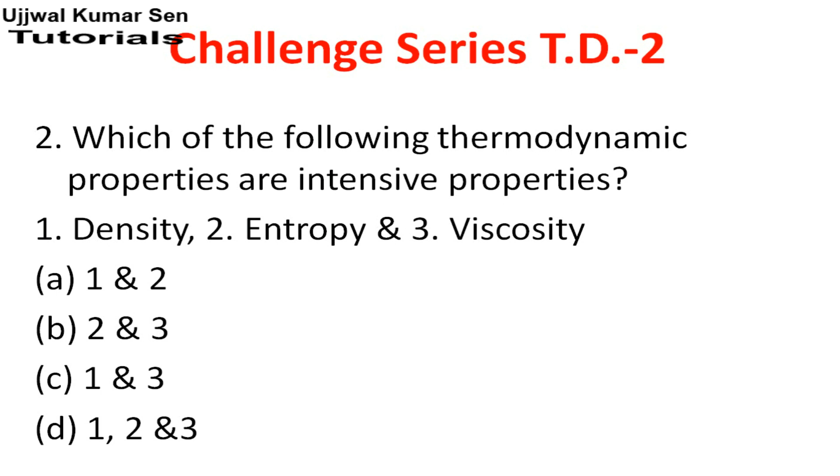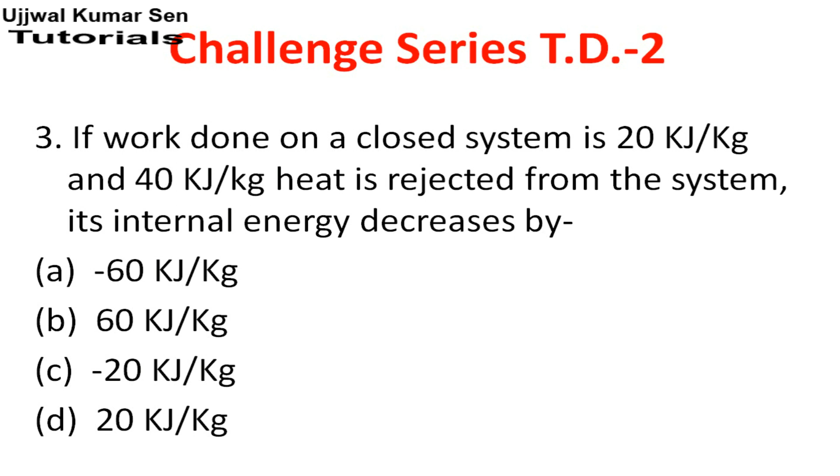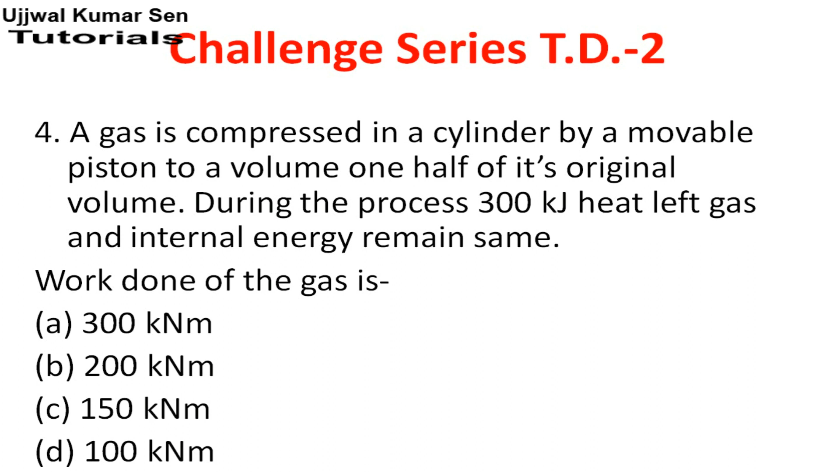Question 4. A gas is compressed in a cylinder by a movable piston to a volume 1/2 of its original volume. During the process, 300 kilojoule heat left the gas and internal energy remains the same. Work done on the gas is: 300 kilo Newton meter, 200 kilo Newton meter, 150 kilo Newton meter, or 100 kilo Newton meter.

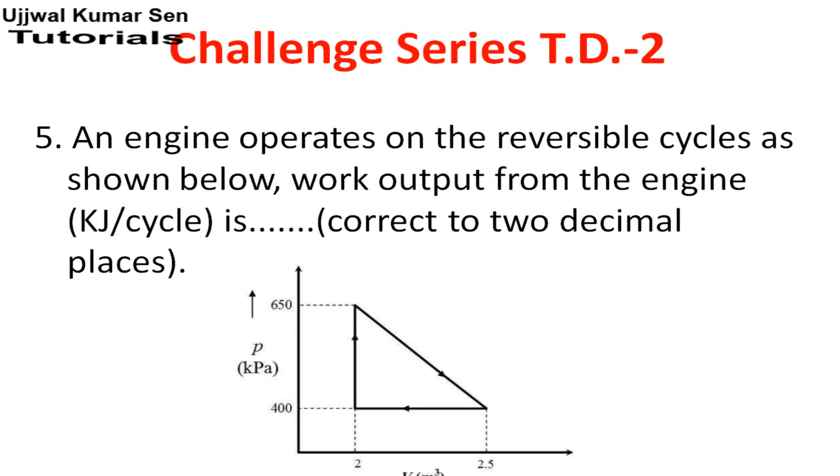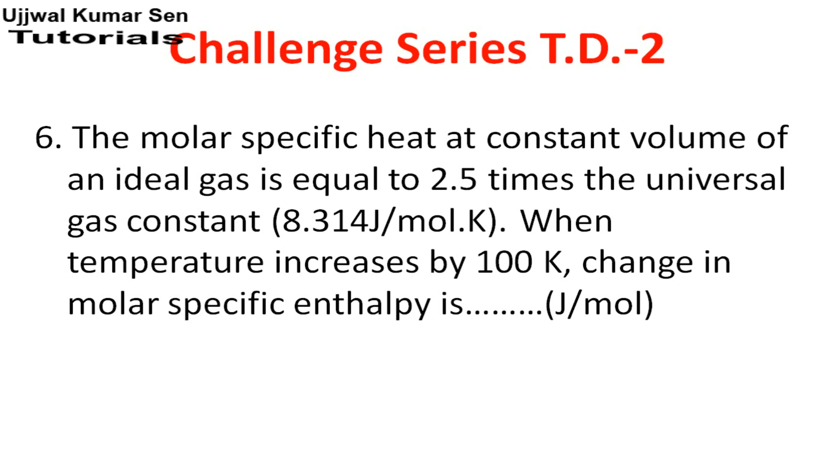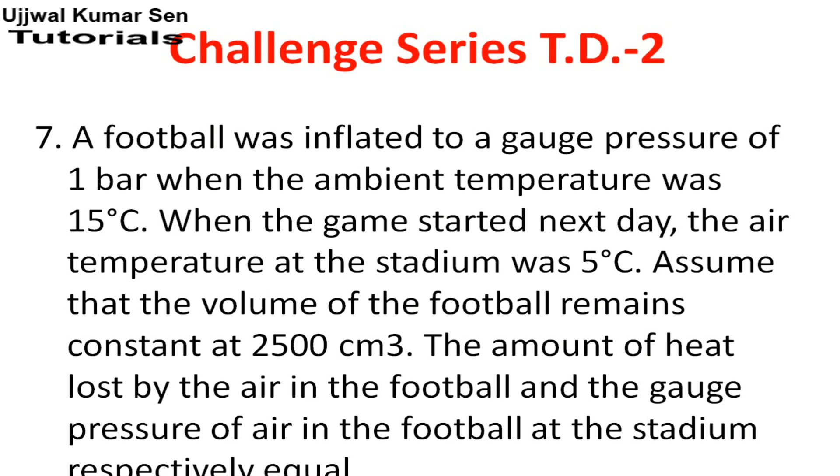Next question. A football was inflated to a gauge pressure of 1 bar when the ambient temperature was 15 degrees centigrade. When the game started the next day, the air temperature at the stadium was 5 degrees centigrade. Assume that the volume of the football remains constant at 2500 centimeter cube. The amount of heat lost by the air in the football and the gauge pressure of air in the football at the stadium respectively equal to. You have to write down the answer. This is also a numeric data type.

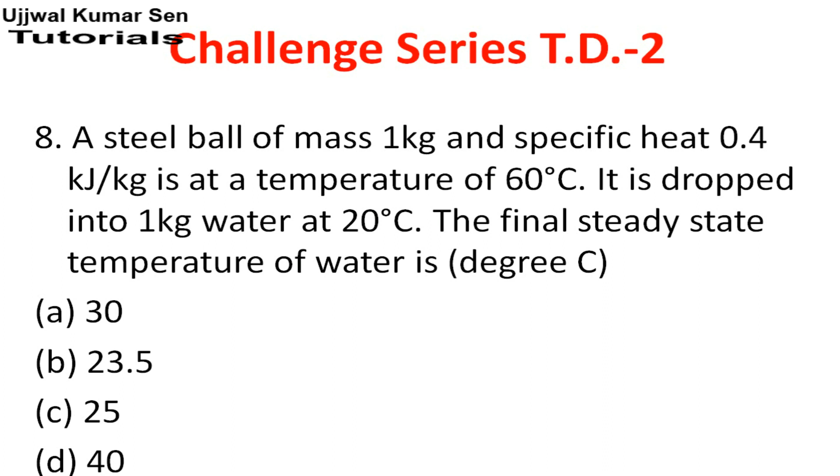A steel ball of mass 1 kg and specific heat 0.4 kilojoule per kg at a temperature of 60 degree centigrade is dropped into 1 kg water at 20 degree centigrade. The final steady state temperature of water in degree centigrade is: 30, 23.5, 25, or 40.

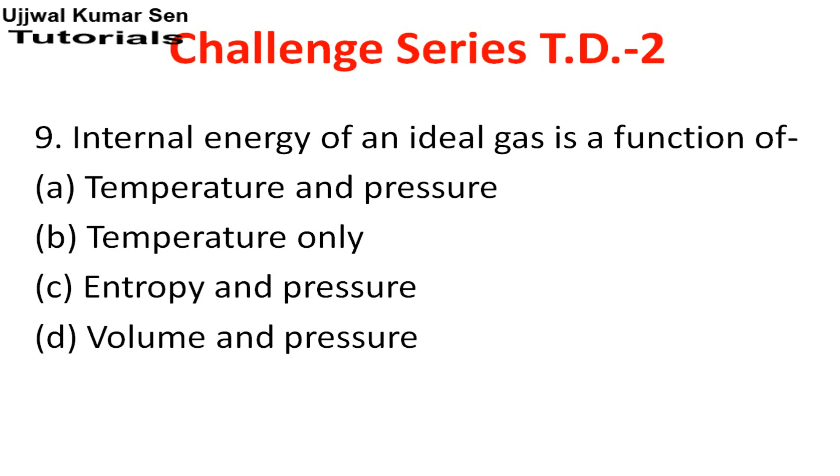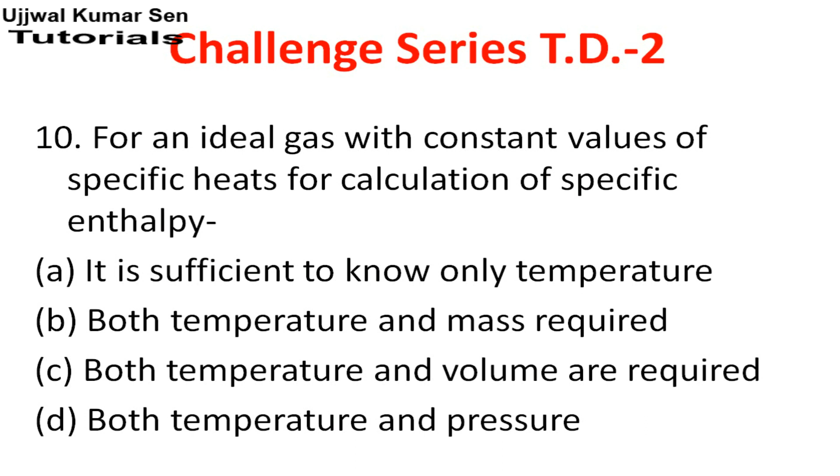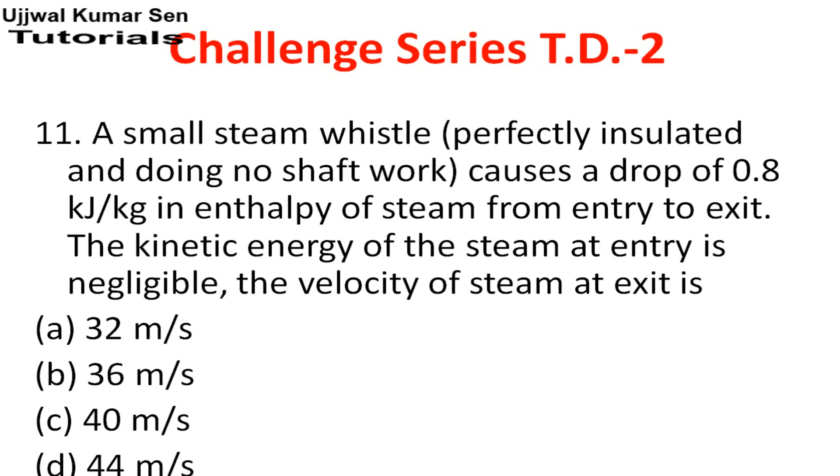Question 11. A small steam whistle, perfectly insulated and doing no shaft work, causes a drop of 0.8 kilojoule per kg enthalpy of steam from entry to exit. The kinetic energy of the steam at entry is negligible. The velocity of steam at exit is: 32 meter per second, 36 meter per second, 40 meter per second, or 44 meter per second.

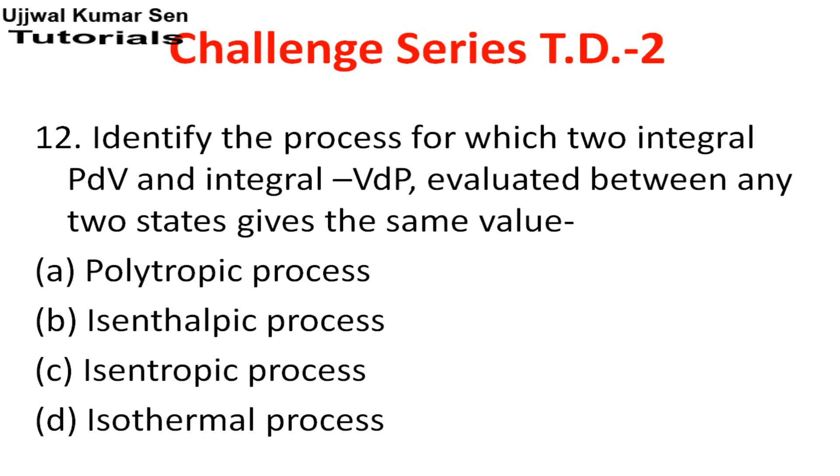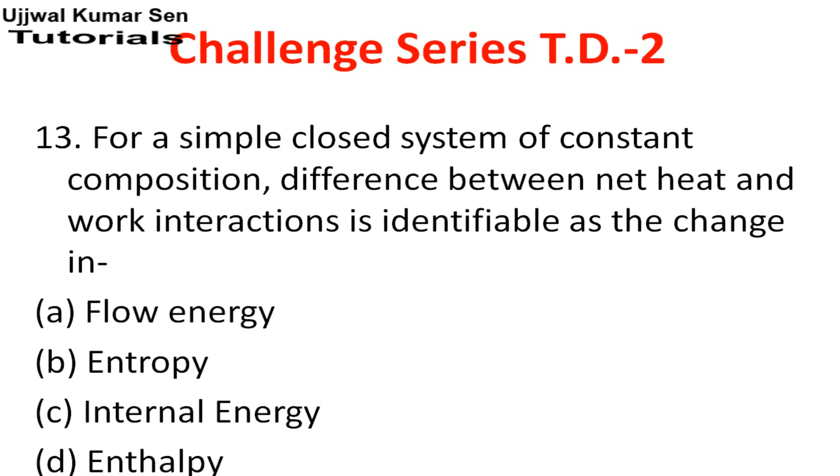Question 13. For a simple closed system of constant composition, the difference between net heat and work interaction is identifiable as: the change in flow energy, entropy, internal energy, or enthalpy. Write down the answer you are getting.